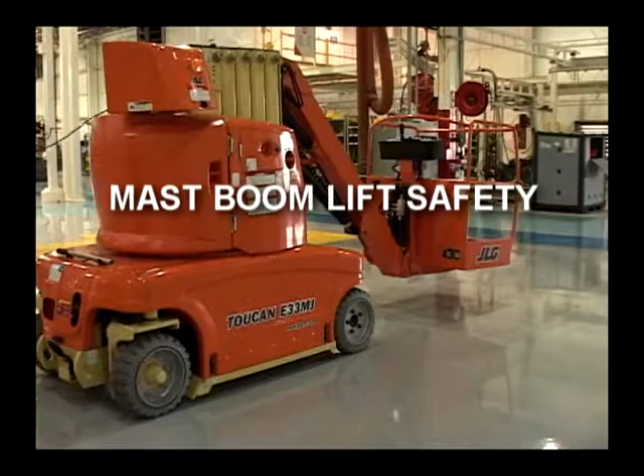JLG Industries Incorporated presents JLG Mast Boom Lift Safety, featuring the following models: E18MJ, E26MJ, and the E33MJ. By following the recommendations for safe and proper operation of this machine, by viewing this video and reading and understanding the operation and safety manuals, you accept responsibility for the safe and proper operation of your JLG lift.

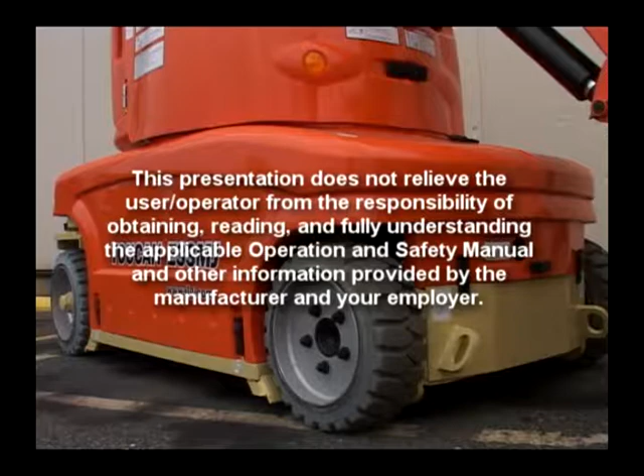This presentation does not relieve the user or operator from the responsibility of obtaining, reading, and fully understanding the applicable operation and safety manual and other information provided by the manufacturer and your employer. In addition, the operator and employer are responsible for complying with the federal, state, local, and provincial rules and regulations covering the proper use and operation of this product.

The Operation and Safety Manual, a safety handbook, and a copy of the ANSI Manual of Responsibilities A92.5 can be found in a plastic compartment located on the platform. These documents must be kept with the machine, and if not available, may be obtained by calling 877-JLG-SAFE, 877-554-7233.

Pre-start inspection. Before each use, a walk-around inspection must be conducted to make sure that there is no visible damage, loose or missing parts, excessive wear, or fluid leakage. The Operation and Safety Manual contains a complete inspection procedure that must be followed. The inspection includes the following: the tire and wheel assemblies, properly secured, no loose or missing lug nuts. The drive motors and brakes, no evidence of leakage. Check under the machine for loose or missing parts as well as any fluid leaks indicating possible damage to the machine.

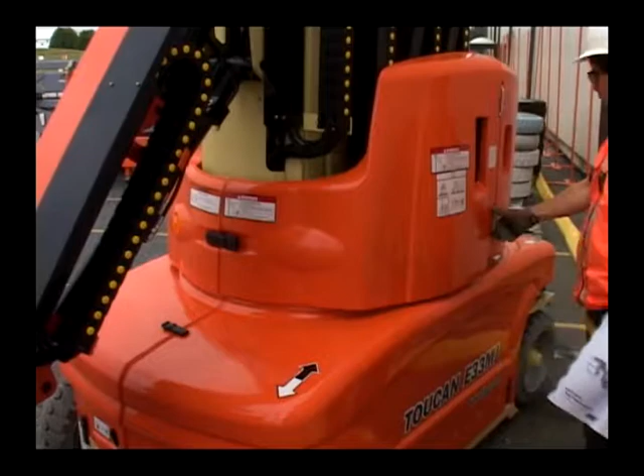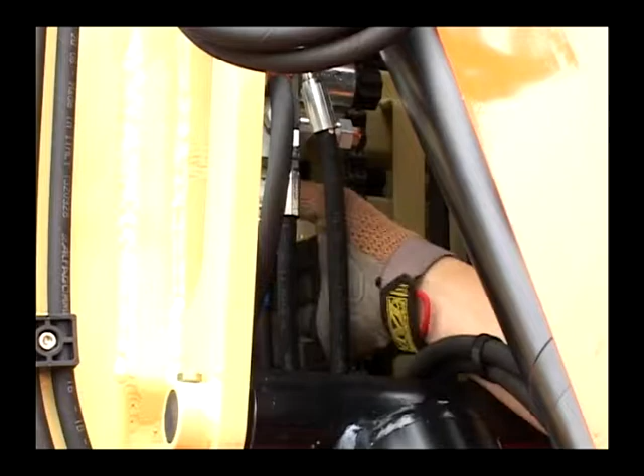The JLG Mast Booms are equipped with a pothole protection system integrated into the frame, providing additional support for the lift should the wheel be driven into or positioned over an unprotected floor opening. The hood assemblies. Make sure there are no loose or missing parts, securely fastened and no visible damage. The mast installation, including the mast chains, electrical cables, hydraulic hoses, and all pins, must be installed and in good condition. Chains must be correctly tensioned and lubricated.

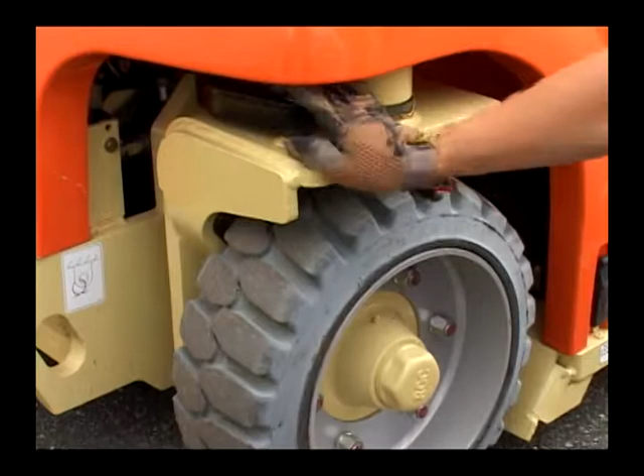The steering assembly, including the spindles. Check for excessive wear or loose or missing parts. The hydraulic control valve. No visible damage, hydraulic hoses undamaged, and no leaks. The hand pump and manual descent operation. Make sure that the decals are legible. The battery charger, properly secured. Consult the service manual for battery charger operation. Different battery chargers are used on different models, so the charger LEDs may not be the same.

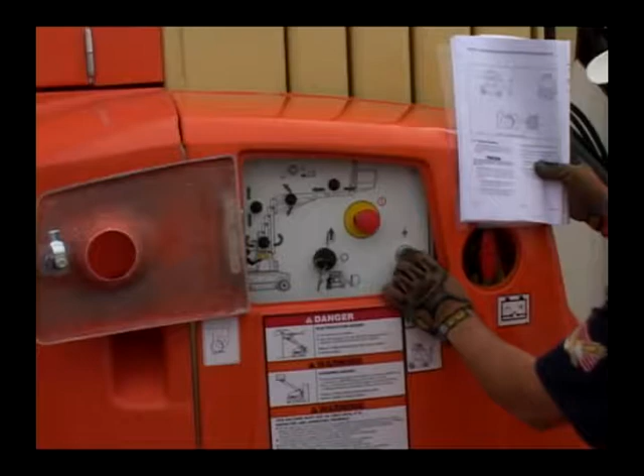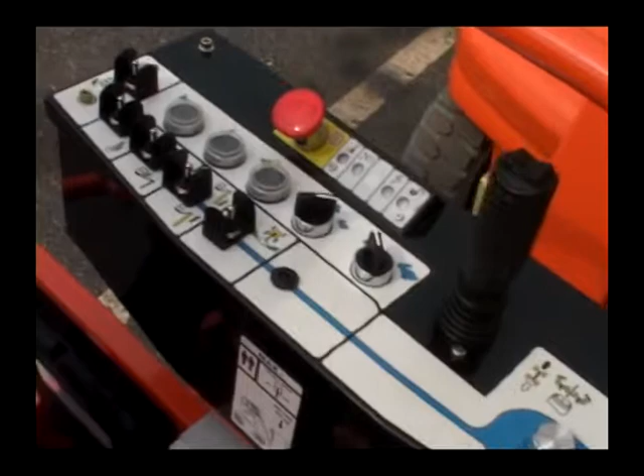The ground control console. Make sure the switches and buttons return to neutral and the decals and placards are secure and legible. The platform assembly, including the platform controls, guardrails, and entrance gates. Make sure the switches and levers are returned to neutral, the decals and placards are secure and legible, the control markings are legible, and the foot switch works properly, not modified, disabled, or blocked.

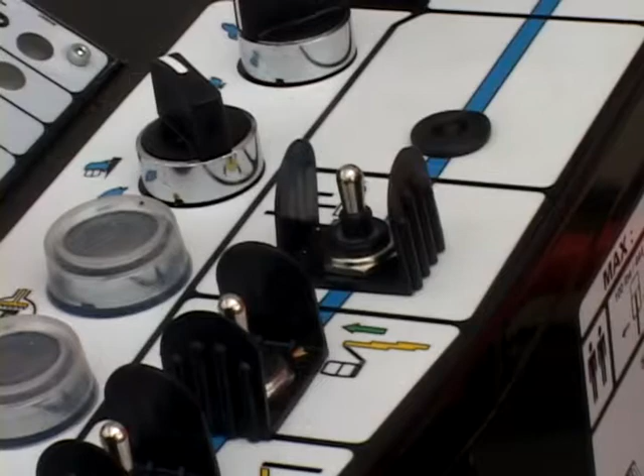Also include the following as part of the walk-around inspection. Placards. Keep all information and operating placards legible, clean, and unobstructed. Make sure none of the decals or placards are missing and that all illegible decals and placards are cleaned or replaced. Protect when spray painting or shot blasting to maintain legibility. Ensure that all copies of the applicable manuals, the Operation and Safety Manual, AEM Manual, and the ANSI A92.5 Manual are in the manual storage holder.

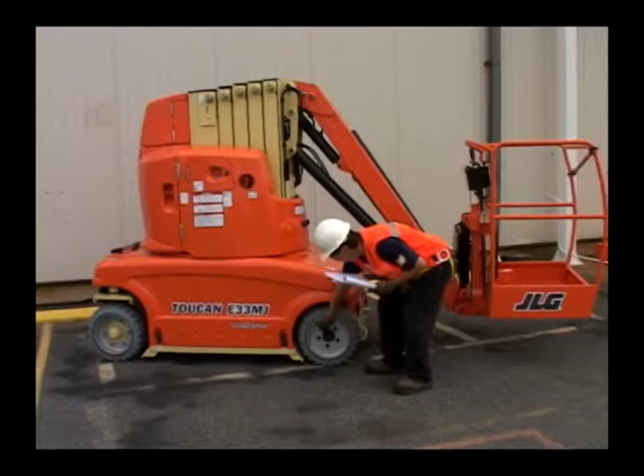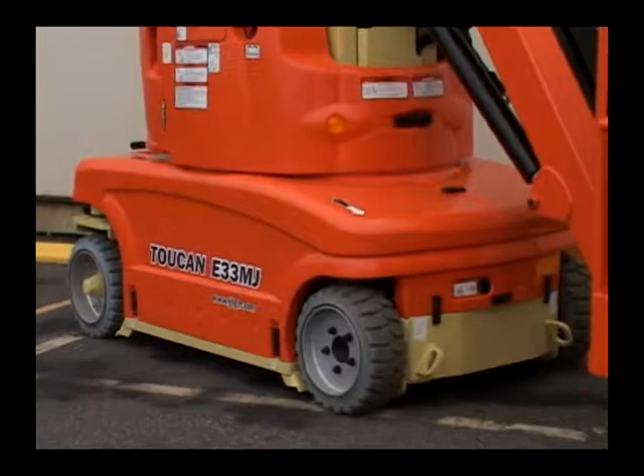Ensure that all periodic inspections and maintenance has been completed as outlined in the Operation and Safety Manual for your specific mast boom lift. Check the machine for modifications to original components. Ensure that any modifications have been approved by JLG. Ensure overall cleanliness. Check all surfaces for leakage, oil or battery fluid, and foreign objects. Inspect the machine structure for dents, damage, weld, or apparent metal cracks or other discrepancies.

You should start each day with fully charged batteries. Don't smoke or have any open flames when recharging. If there is any evidence of a problem, shut down the lift, remove it from service, and notify the proper authorities.

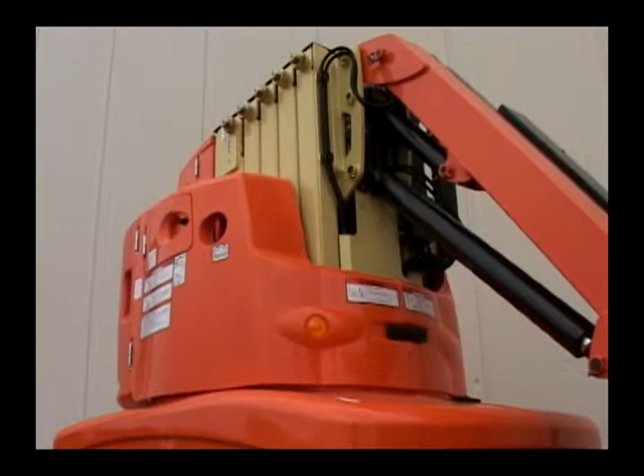Controls and daily function check. A function check of all systems must be performed after the walk-around inspection is complete. The machine must be positioned on a smooth, firm, level surface in an area free of overhead and ground level obstructions. Read, understand, and obey all danger, warning, and caution placards and operating instructions on the machine and in the applicable manuals prior to operation. Do not operate the machine until you've done so. Before operating the lift, verify that you're using the proper personal protective equipment.

JLG E18MJ, E26MJ, and E33MJ lifts are equipped with control panels that use symbols to indicate control functions. Refer to your Operation and Safety Manual or the legend located near the platform and ground controls for a listing of these symbols and their corresponding functions.

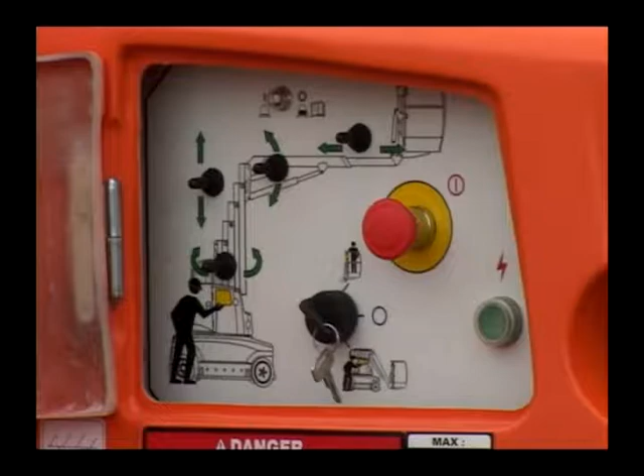Now complete a function check of the machine from the ground controls. The battery disconnect switch is located beside the ground control station. The switch needs to be rotated clockwise to connect and counterclockwise to disconnect the batteries. The Power Select key switch is a 3-position key operated switch that provides power to either ground or platform controls.

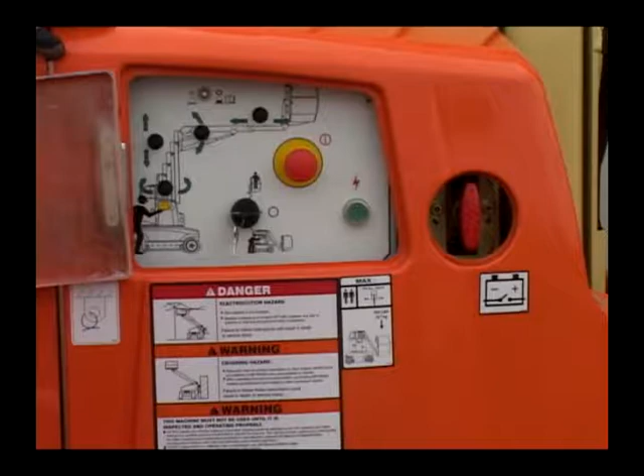The red emergency stop switch button shuts off power to all functions when depressed. Turn the button clockwise to reset the emergency stop switch. The green Function Enable button must be pushed and held to operate any function.

The turntable swing switch. Move the switch to the right to swing the turntable to the right, or move the switch to the left to swing the turntable to the left. The machine has a non-continuous 360-degree swing function.

Mast up and mast down functions are activated by pressing either the mast up or mast down switch. Platform movement stops when a selected switch is released. Raise and lower the platform through several cycles. Check for smooth operation.

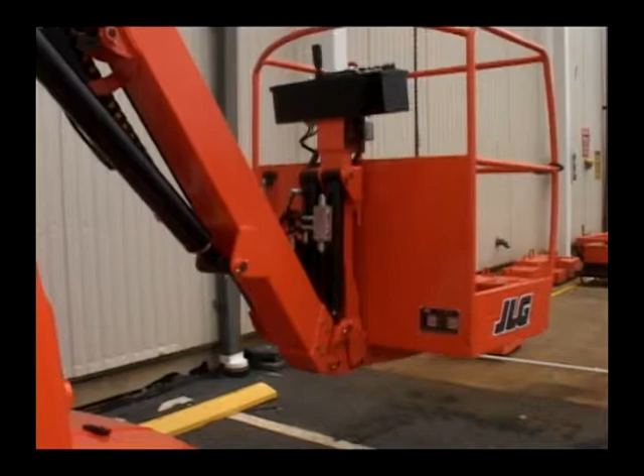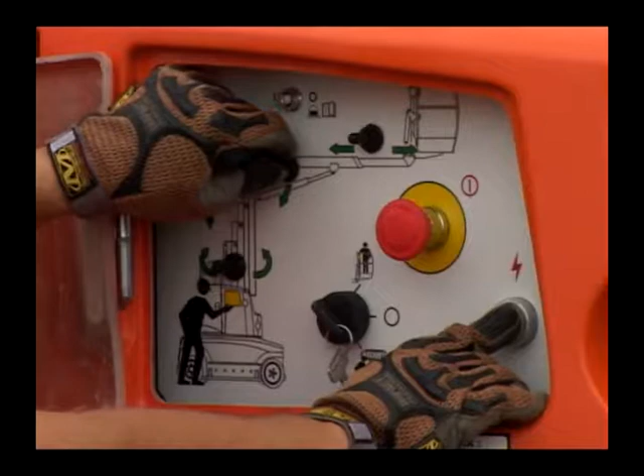The jib boom switch moves the jib up or down. The jib boom will reach above the mast to gain higher heights or fold up below the mast to fit through doorways. Moving the jib up or down will automatically keep the platform level. Please note, the platform level does not have a manual override switch in the ground control of the E33MJ.

On the E33MJ, the jib boom telescope in and jib boom telescope out functions are activated by pressing the jib boom telescope in or out switch. The jib boom telescope allows extra reach anywhere in the working envelope.

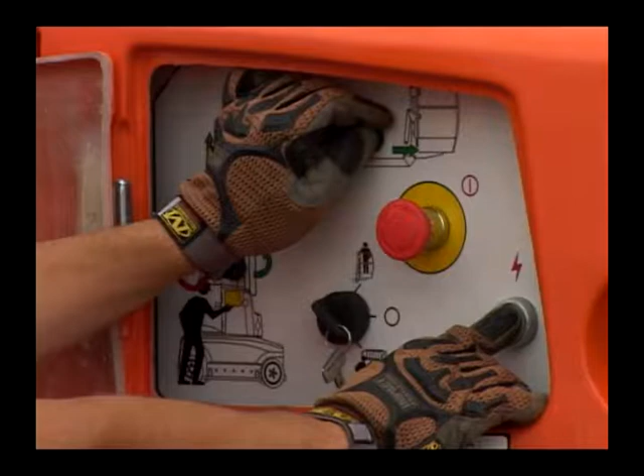Check the emergency stop switch button function by depressing it while raising the jib. All machine functions will be disabled if it's functioning properly. If it functions properly, reset the emergency stop switch button for operation.

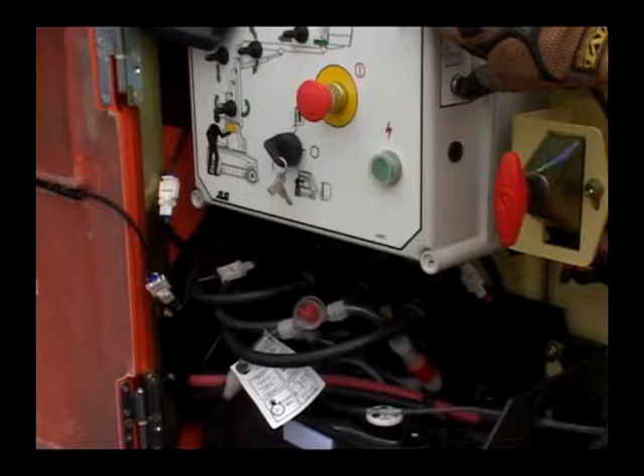The battery filling pump button is located beside the right hood cover. Depressing the push button to activate the battery filling pump will replace evaporated water from the batteries. An indicator will stop turning when the batteries are full.

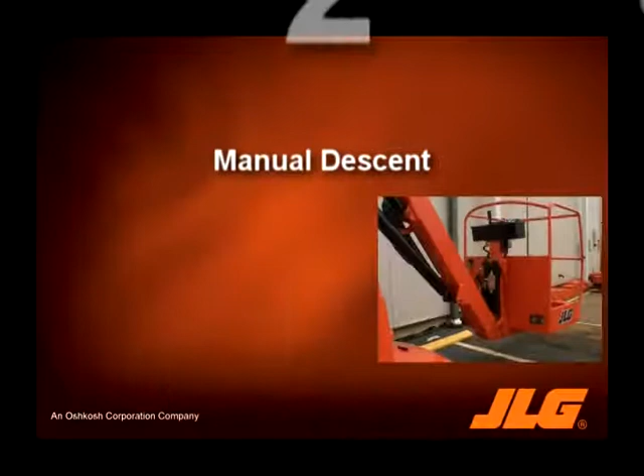The manual descent valves are individual hydraulic valves for each function located at the front base of the machine that can be used to lower the platform in the event that the platform and ground control stations are inoperable. To operate the manual descent valves and lower the jib boom, mast boom, jib boom telescope, or swing, press and hold the override push buttons located at the top and bottom of each valve while activating the hand pump.

Verify the proper operation of the manual descent system. Raise the platform between 2 and 3 feet with the jib boom switch at the ground controls. Locate the manual descent system and follow the operating instructions as specified in the Operation and Safety Manual and on the machine.

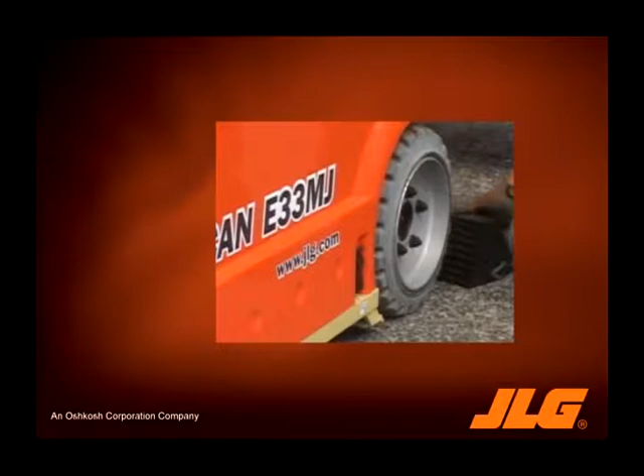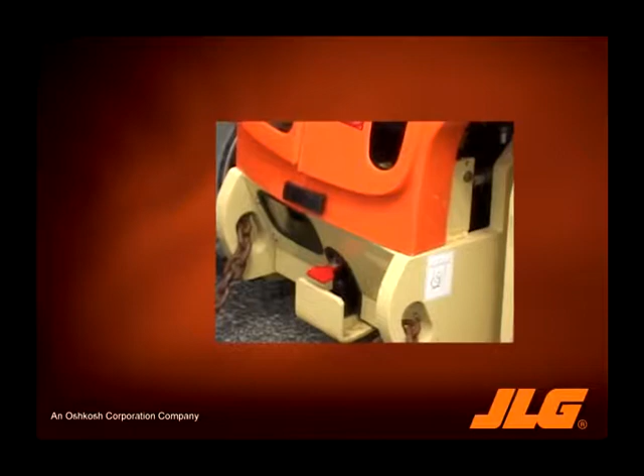The brake release lever disengages the brakes when moved to the unlock position and activating the hand pump. The brakes must be disengaged when moving the machine by any means other than driving, such as pushing or using a forklift when applicable. Only disengage the brakes when the machine is placed on a level surface or when the machine has been fully restrained to prevent unintended movement.

The brakes must be re-engaged by moving the brake release lever to the lock position. The brakes must be engaged before any function will operate from the ground or platform control station. This concludes the functional check of the ground controls. Now perform a functional check of the platform controls.

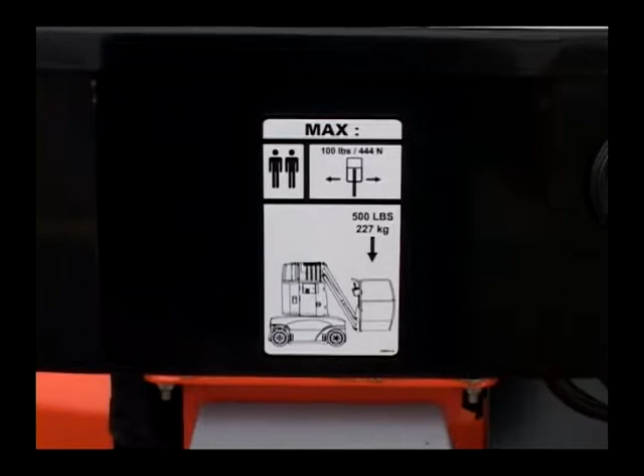Platform operations. The maximum rated capacity of the mast boom lifts are displayed at the platform and in the Operation and Safety Manual. The 500-pound rated platform capacity includes the weight of the operator and tools. Care should be taken to never exceed the rated capacity.

Use extreme caution when entering or leaving the platform. Ensure that the platform is fully lowered. Always face the machine and use the 3-point contact method when entering or leaving the platform. The 3-point contact method means that 2 hands and 1 foot, or 1 hand and 2 feet, are in contact with the machine at all times while entering or leaving the platform.

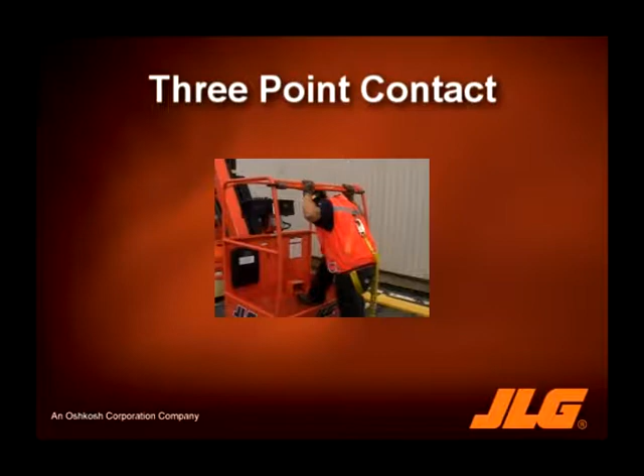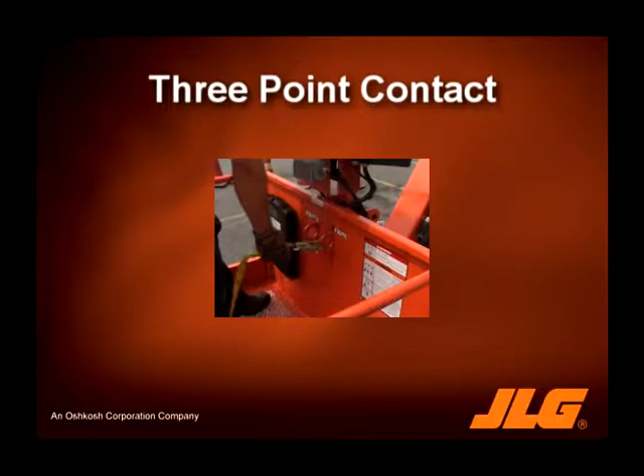Enter the platform. Ensure that the drop bar is closed and properly secure the lanyard for your fall protection device to the designated anchorage point. The red emergency stop switch button shuts off power to all functions when depressed. Turn the button clockwise to reset the emergency stop switch button.

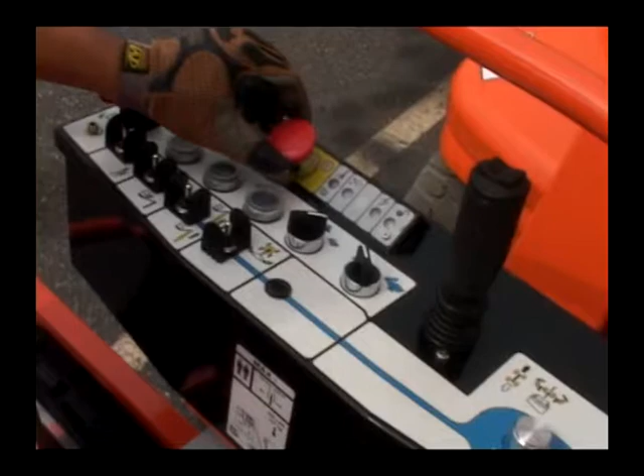First, check the battery discharge indicator. As the battery discharges, the bar light moves from the right to the left; 10 bars showing 0% discharge. As the machine is worked, the light bar will slowly move to the last 2 light bars on the left side. At 80% discharge, the power will be cut off and the batteries will need to be charged. The hour meter is also located in the same gauge.

The tilt indicator light and alarm. Excessive tilting of the machine will turn on the red light and an audible alarm if the mast boom is raised above the elevation switch setting. Below elevation or in the transport mode, no lights or alarm will sound. Slack chain indicator light and alarm. If the mast boom chains detect a slack in any of the chains, the red light and alarm will sound.

The slack chain indicator light is primarily used when the chains become stretched, damaged, or not adjusted properly. The light will illuminate if the platform is set on an obstruction and the mast boom cannot detect any load. We will cover this more in detail later in this video.

Unauthorized movement indicator is an orange light which indicates the machine is in a configuration where the activation of movement is not permitted. Many conditions will illuminate this light: trying to drive while tilted, trying to jib boom down while in a slack chain condition, trying to use a mast or jib function while driving, and trying to drive while using a mast or boom function are some of the conditions that will cause the orange light to glow.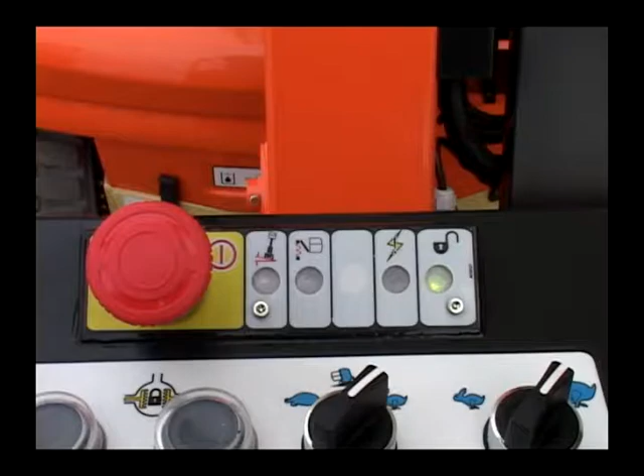Power enable indicator. A green light indicates that the controls are ready. To enable any function, press and hold the foot switch, then press and hold the desired switch to control the functions. The foot switch and function switches must be continuously activated to control the movement of the platform.

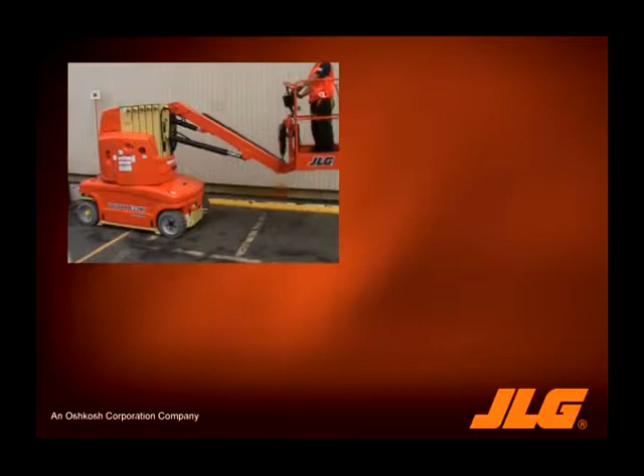Verify the proper operation of the machine functions by raising, lowering, swinging, telescoping, and leveling the platform through several cycles. Also check for smooth operation by using the turntable swing control switch, mast boom control switch, and jib boom control switch. Use the jib telescope control switch and platform leveling control switch for the E33MJ only.

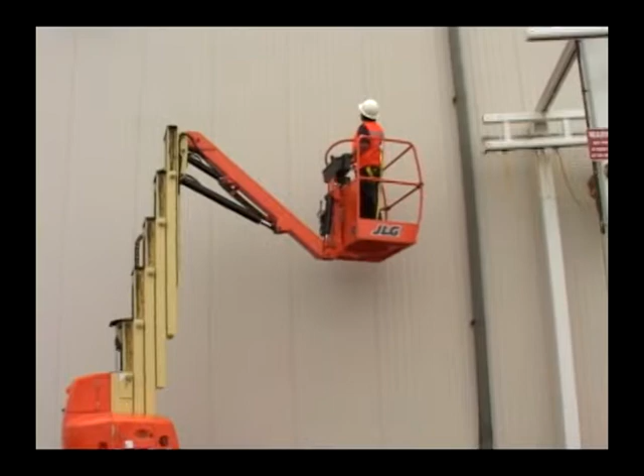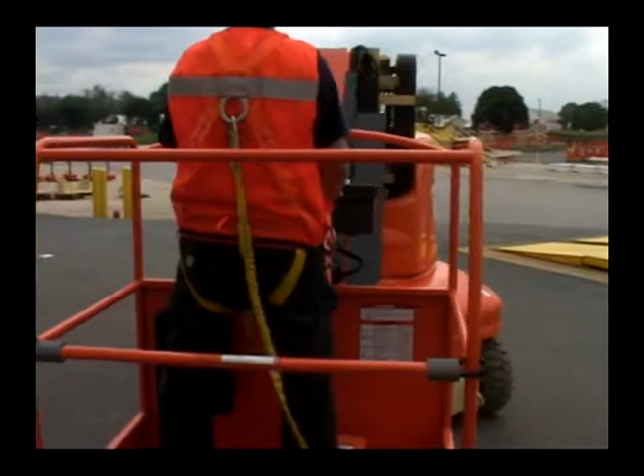When elevating, the platform will automatically stop moving when the maximum height is reached or the mast, jib, or telescope switch is released. When swinging, the platform moves in the direction of the arrow on the platform decal. The swing function is a non-continuous 360-degree rotation. Mechanical stops will keep the turntable from turning more than 360 degrees.

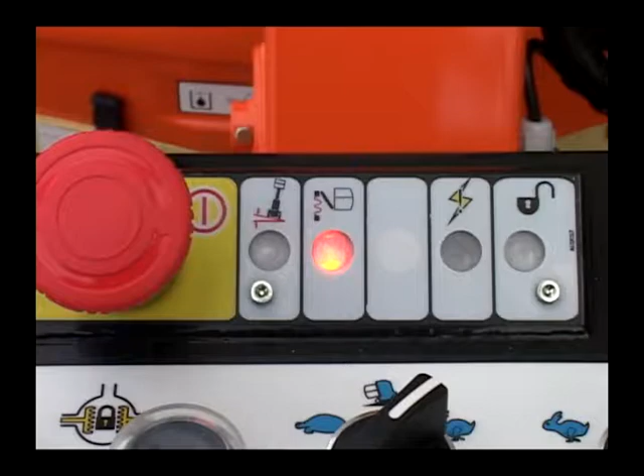If the platform is lowered onto an obstruction and the mast boom continues to lower, one or more of the slack chain sensors will send a signal to the slack chain indicator light and will cut out all functions except the mast boom lift up and the jib boom lift up. To reset this indicator light, use the mast boom lift up or the jib boom lift up switch.

The jib boom switch. When elevating the jib boom, be aware that the jib boom travels in an arc to the maximum position. The platform may contact an object. When lowering the jib boom, check the area under the platform to make sure it is clear. Always lower the platform to the fully lowered position before exiting the platform.

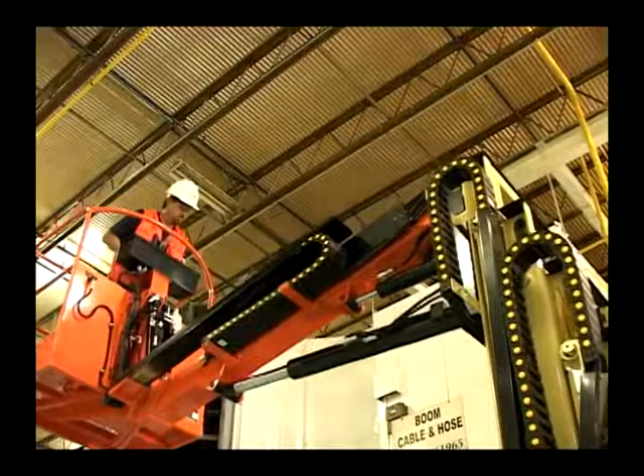When extending the jib boom telescope, the platform, depending on the position of the jib boom, can either raise or lower. Caution should be used not to extend the platform to make contact with the ground. Also be aware the lifting arc of the platform is increased traveling to the maximum position. The platform may contact an object. When retracting the jib boom telescope, the platform, depending on the position of the jib boom, will lower or raise as well. Check under and around the platform to make sure it is clear.

When using the platform leveling control switch, only on the E33MJ, pull the switch to tilt the platform backwards. Push the switch to tilt the platform forwards. This function only works in the transport position, consisting of mast fully lowered, jib boom fully lowered, and jib telescope fully retracted. The platform will automatically level when the jib boom is moved up or down in any position.

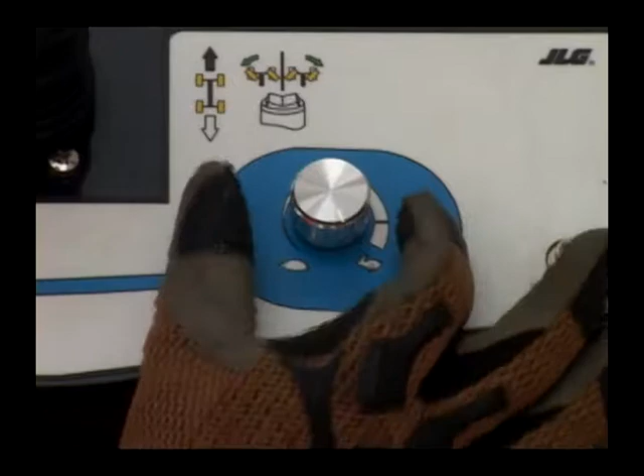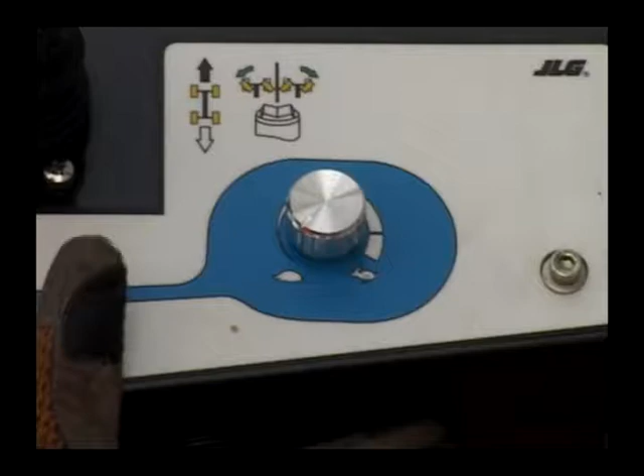The function speed control is used to increase or decrease the speed of movements. When the knob is turned counterclockwise to the left turtle position, the mast boom, swing, and jib boom movements, except for the drive, are performed at low speed. Turn the knob clockwise to the right rabbit position to increase the speed of the mast boom, swing, or jib boom movements. The horn button will sound the horn.

The auxiliary power button. Once the electrical power is cut due to excessive battery discharge, 80%, the auxiliary power button can be pressed to use the remaining battery charge to travel to the charging station. The button must be pushed and held before the controls are enabled and the desired movement is controlled. An audio beep is actuated when the button is depressed.

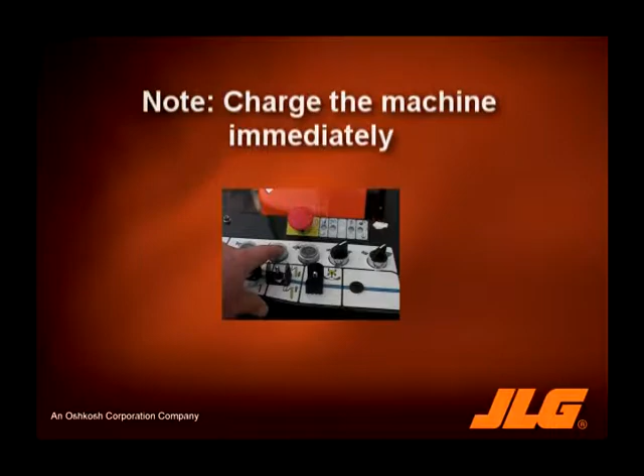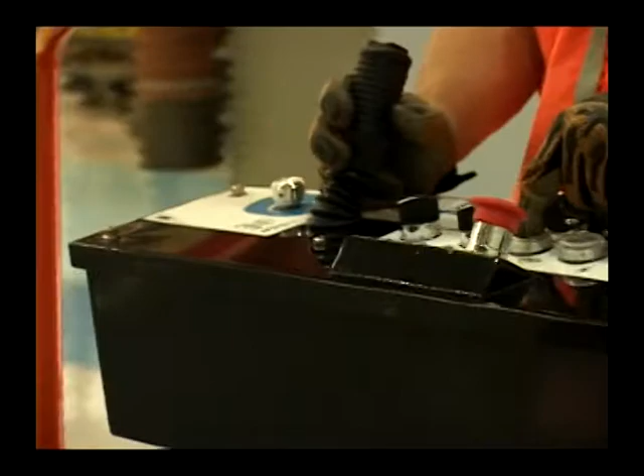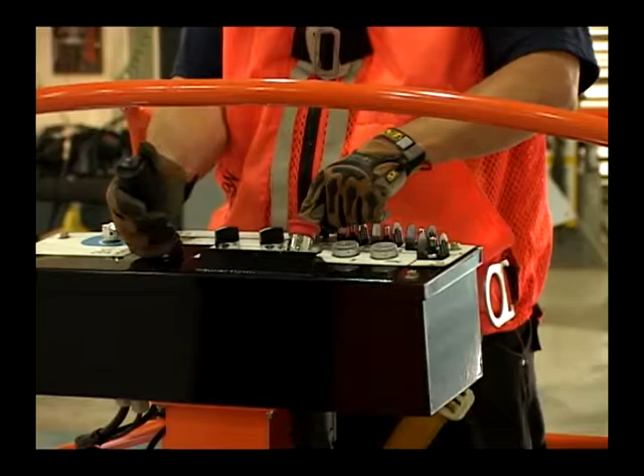The positive traction button must be pushed and held to engage the positive traction function. When a wheel does not have full traction, this control enables transfer of the hydraulic power to the opposite driving wheel. Maximum efficiency is achieved when the wheels are straight. Use of this control should only be temporary. The function is only available when the machine is stowed. This function is not available if the drive speed selector switch is on low speed or turtle.

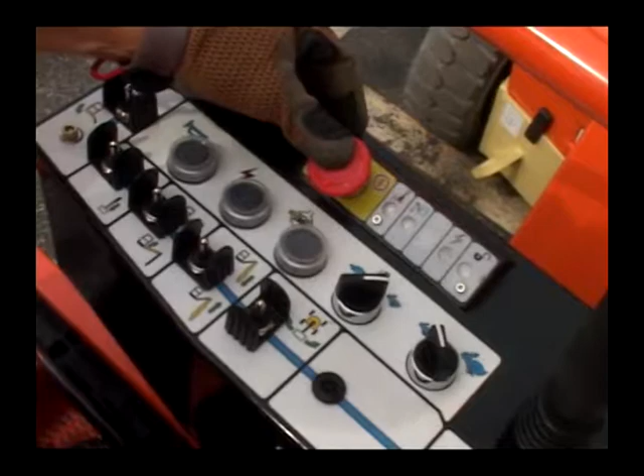If any function selected does not stop when intended, push the emergency stop switch button. Then, if the platform is elevated, seek the assistance of someone to lower the platform using the manual descent valves located at the base of the machine. Immediately notify the proper personnel and remove the lift from service until the problem has been corrected.

Moving the rocker switch on the end of the drive controller will steer the machine in the direction selected. Evaluate the steer function operation, comparing the decal on the platform control to the position of the turntable, so the wheels turn in the desired direction. Steer left and right and check for proper operation.

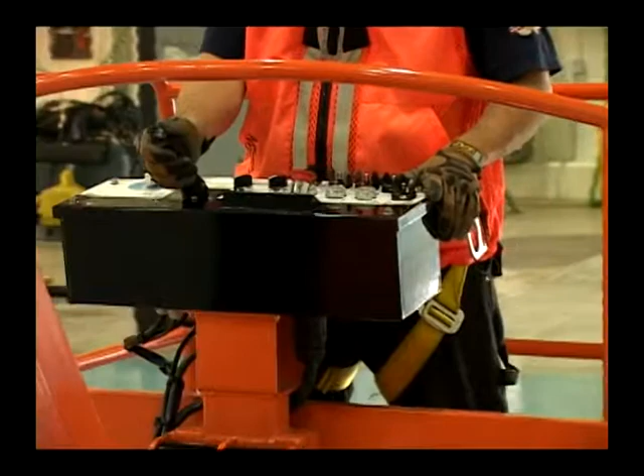To enable the drive function, depress the foot switch, lift up on the ring to unlock the controller, then move the drive control handle to drive forward or reverse. Push forward to drive forward and pull back to drive in reverse. Check the drive function for proper operation by driving forward and reverse.

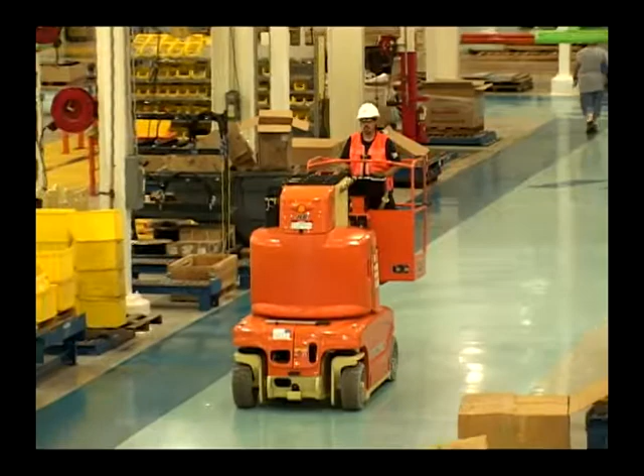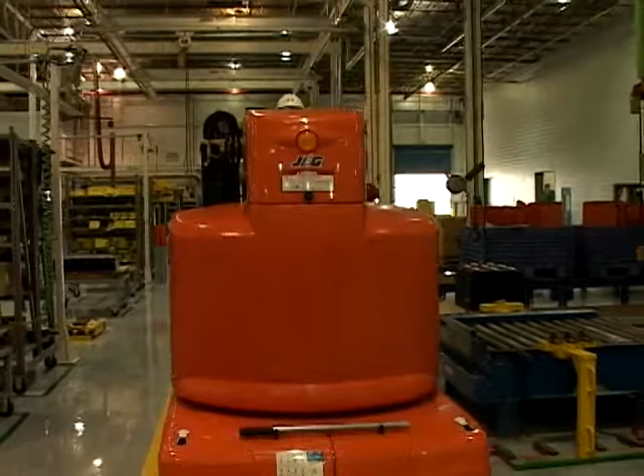The drive control handle is proportional, allowing the drive speed to be decreased or increased by the movement of the handle. Never slam the control handle through neutral to the opposite direction. Always return to neutral and stop before moving to the next function. Operate controls with slow and even pressure.

The black and white direction arrows on both the chassis hood and the platform control box will help the operator orientate the direction of travel if the boom is swung 90 degrees. Match the black and white arrows on the decal by the drive controller to the arrows on the chassis hoods so the machine will move in the intended direction.

A drive speed selector switch allows the machine to have 3 speeds. Turtle, or first speed, is a slow speed for positioning the machine in tight areas. Ramp, or second speed, is for climbing speed and allows the machine to climb maximum grades. The grade must not exceed the rated gradability as stated in the Operation and Safety Manual for the applicable JLG lift model. Rabbit, or third gear, allows the machine to travel at maximum speed.

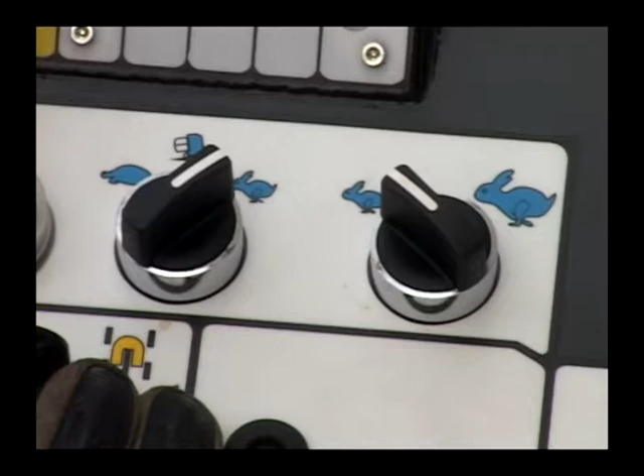A second drive speed selector switch is only used on the E33MJ. This switch is called the Drive Extra Speed Selector Switch and has a small rabbit and large rabbit. This control is operational only when the drive speed selector is in third speed. To enable fourth speed, the Drive Extra Speed Selector switch is positioned on the large rabbit. Once in fourth speed, a secondary hydraulic power unit will start at the end of the drive control joystick travel, thus increasing the drive speed.

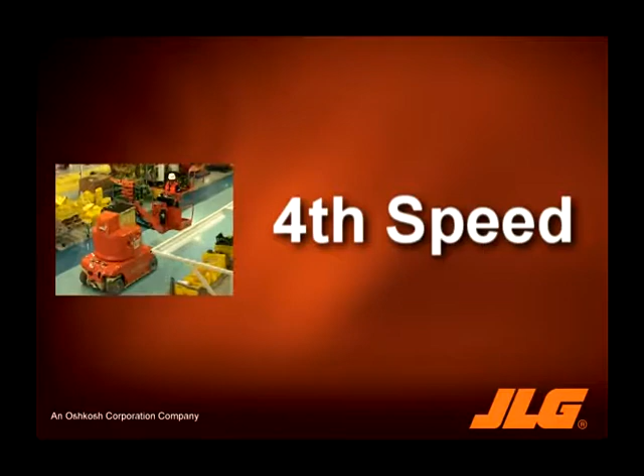Use of this control is reserved to travel over long distances and on horizontal grounds. If the machine arrives on a sloped surface, the secondary power unit will stop and start again only when the machine returns to a level surface.

The maximum drive speed is automatically reduced when the mast boom is elevated above transport position approximately 6 inches. On the E33MJ, there are 2 additional cutouts, 2 inches extended on the jib telescope and 20 inches on the jib boom. If the maximum drive speed does not reduce when the platform is elevated above 20 inches, shut down the machine, remove it from service, and notify the proper personnel.

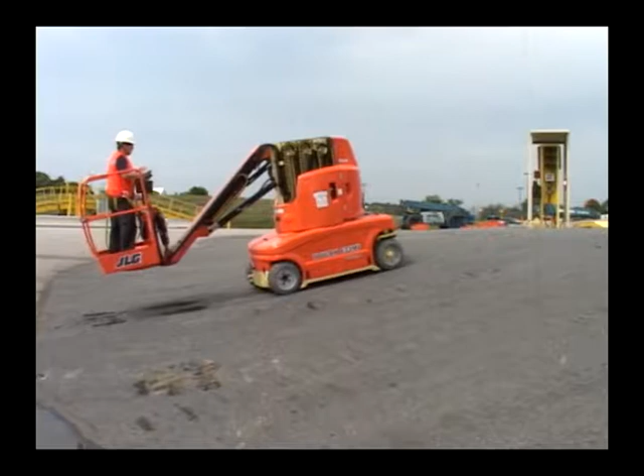With the platform in a stowed position, check that the drive brakes hold when the machine is driven up and stopped on a grade. The grade must not exceed the rated gradability as stated in the Operation and Safety Manual for the applicable JLG lift model. Ensure that all drive and/or lift cutouts operate properly.

The lift is equipped with a tilt sensor and a drive lockout function that disables the elevation control when the lift is positioned on a slope greater than 5 degrees. With the platform elevated, the drive control is disabled when the lift is driven on a slope greater than 5 degrees. Consult the specific model and country specifications in the Operation and Safety Manual to determine the cutout settings on your specific unit. This concludes the functional check of the JLG mast booms.

If any of the functions or cutouts outlined in this video or in the Operation and Safety Manual for the applicable JLG lift model do not function properly, shut down the machine, remove the unit from service, and notify the proper authorities.

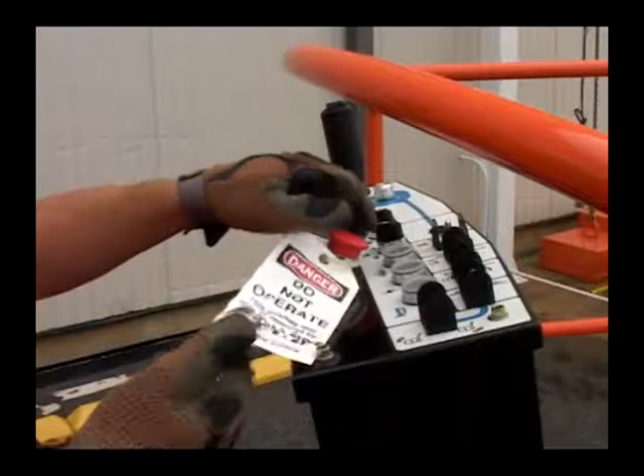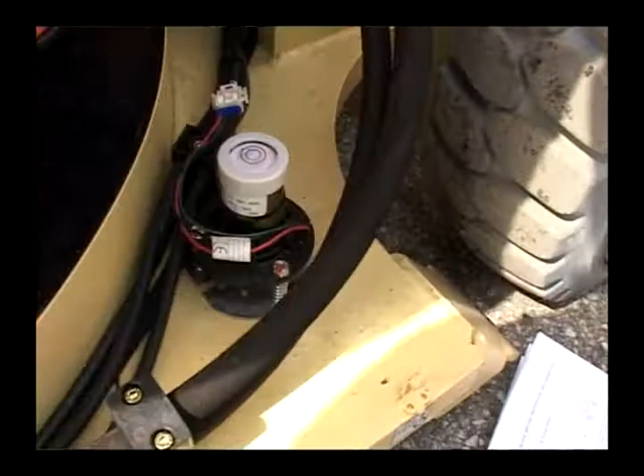Safety precautions. Some general safety precautions must be followed during operation of a JLG mast boom lift. Do not operate any machine on which the safety or instruction placards or decals are missing or illegible. Ensure all safety devices are operating properly. Modification of these devices is a safety violation. Never operate a machine that is not working properly. If a malfunction occurs, shut down the machine.

The machine is not insulated and does not provide protection from contact or proximity to electrical current. Maintain a safe distance from electrical lines, apparatus, or any energized, exposed, or insulated parts according to the minimum approach distance as outlined in the Operation and Safety Manual. Allow for machine movement and electrical line swaying.

Maintain a clearance of at least 10 feet or 3 meters between any part of the machine and its occupants, their tools, and their equipment from any electrical line or apparatus carrying up to 50,000 volts. Refer to the minimum approach distance chart located in the Operation and Safety Manual for additional clearance.

The minimum approach distance may be reduced if insulating barriers are installed to prevent contact, and if the barriers are rated for the voltage of the line being guarded. These barriers shall not be part of or attached to the machine. The minimum approach distance shall be reduced to a distance within the design working dimensions of the insulating barrier. This determination shall be made by a qualified person in accordance with the employer, local, or governmental requirements for work practices near energized equipment. Assume all electrical parts and wiring are energized unless known otherwise.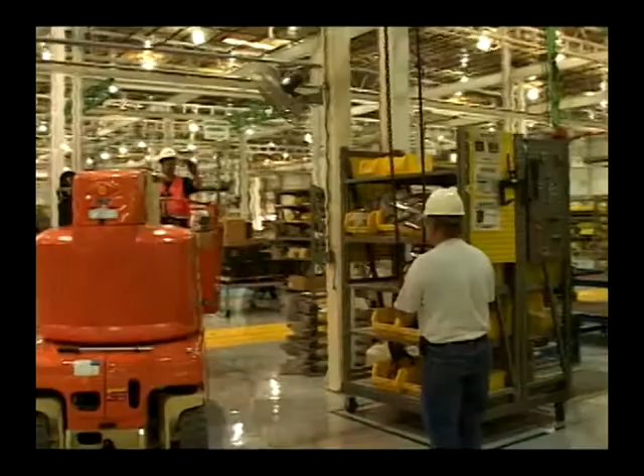Ensure that operators of other overhead and floor-level machines are aware of the lift's presence. Disconnect power to overhead cranes. Warn personnel not to work, stand, or walk under raised platform. Position barricades on the floor as necessary. Do not operate or raise the platform while on trucks, trailers, railway cars, floating vessels, scaffolds, or other equipment unless approved in writing by JLG.

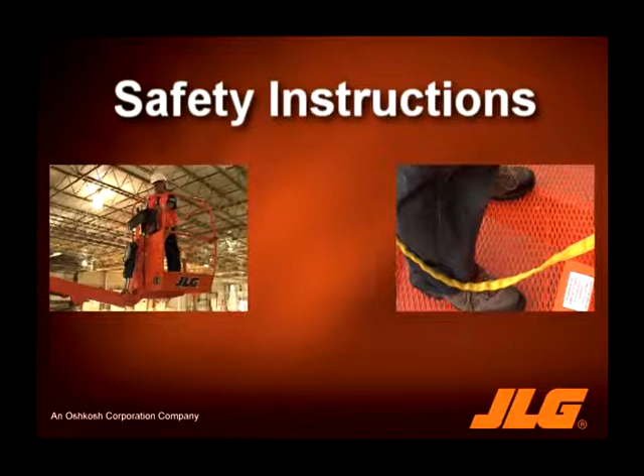During operation, keep all body parts inside the platform railings. Check work area clearances above, on sides, and bottom of the platform when lifting and lowering the platform. Do not carry materials directly on the platform railings. Keep both feet firmly positioned on the platform floor at all times. Never use ladders, boxes, steps, planks, or similar items on the platform to provide additional reach. Always ensure that power tools are properly stowed and never left hanging by their cord from the platform work area.

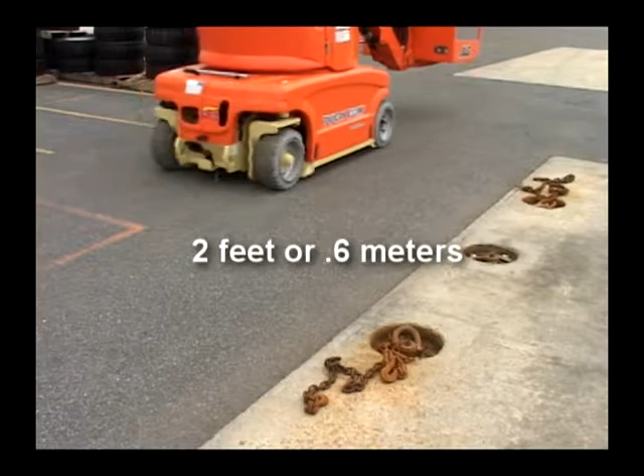Avoid any buildup of debris on the platform floor. Keep mud, oil, grease, and other slippery substances from footwear and the platform floor. Keep the chassis of the machine a minimum of 2 feet, 0.6 meters, from holes, bumps, drop-offs, obstructions, debris, concealed holes, and other potential hazards at the ground level. Be aware of stopping distances and all drive speed. The user should be familiar with the work area surface before driving.

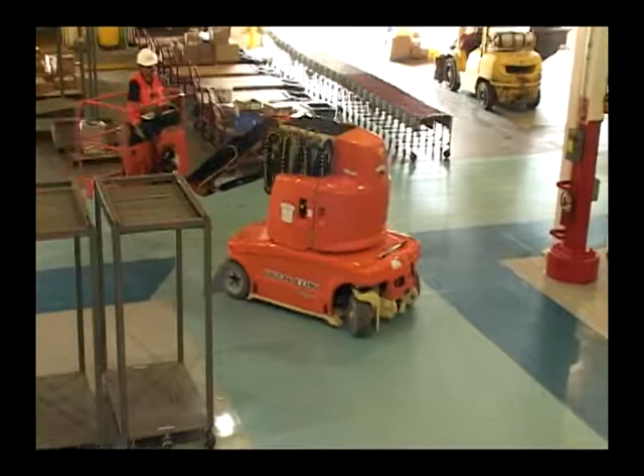Exercise extreme caution at all times to prevent obstacles from striking or interfering with operating controls and persons in the platform. Do not drive at high speeds in restricted or close quarters or when driving in reverse. Always post a lookout when driving in areas where vision is obstructed.

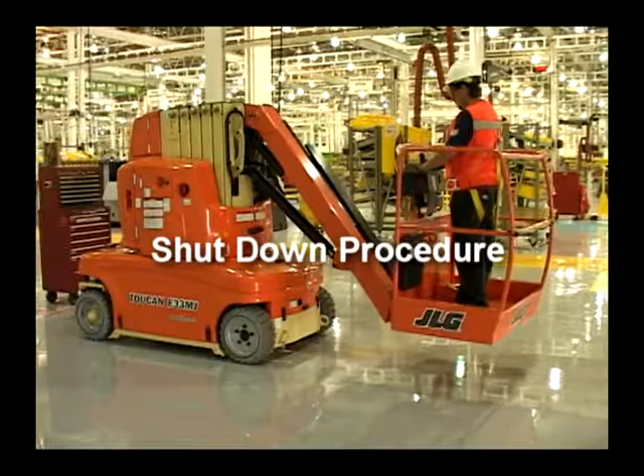Shutdown procedure. To shut down and park the machine, first drive the machine to a well-protected area. Ensure the platform is fully lowered. Push in the emergency stop switch buttons at the platform and ground controls. Position the key switch to off. Rotate the battery disconnect lever to disengage battery power. Chock at least 2 wheels when parking the machine for an extended period of time.

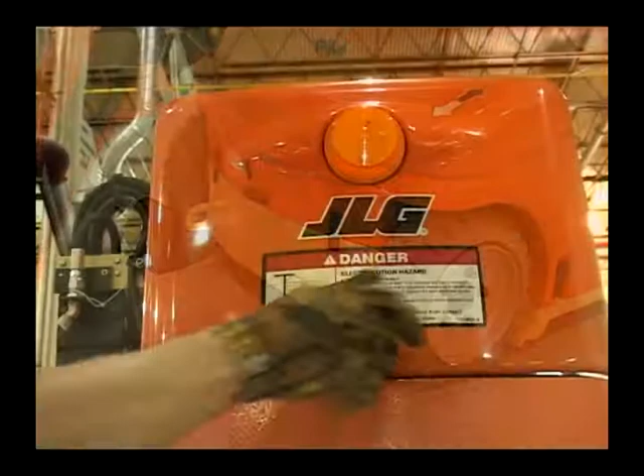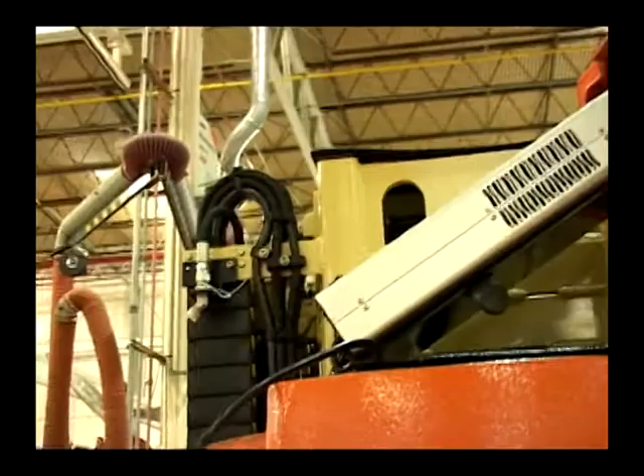Charging the battery. Always charge the battery in a well-ventilated area. The JLG mast boom lifts are equipped with an automatic battery charger that will stop charging when the battery is fully charged. The battery can be charged daily without concern for overcharging or damage to the battery. To charge, place one end of an extension cord rated for 15 amps into the charge plug receptacle at the front of the lift and the other end into a standard 110-volt outlet.

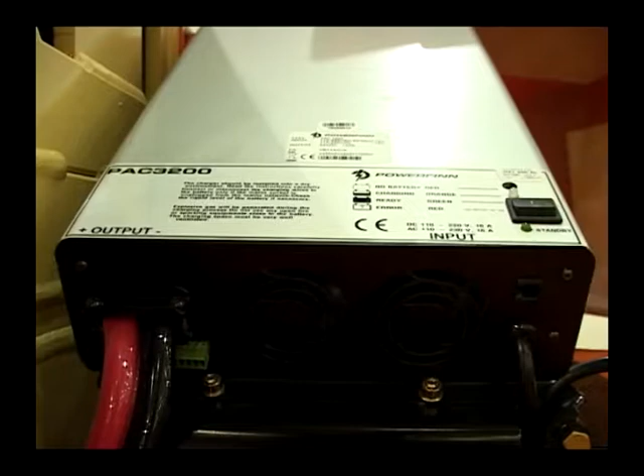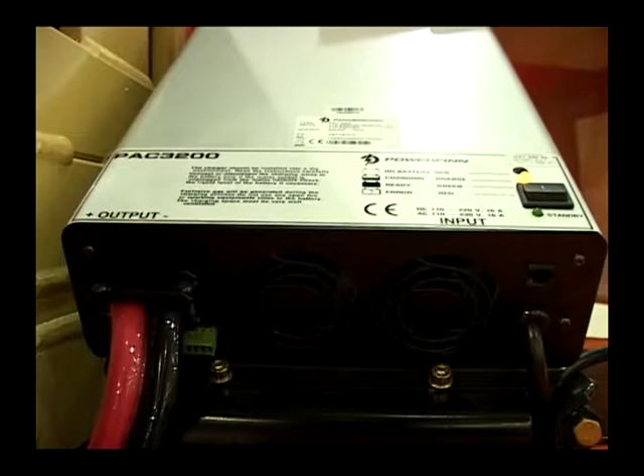When the charger is connected to the power supply, all the functions are cut out. Turn the power switch to the on or I position, which should start the charge automatically. Once the charge cycle is complete, the solid green light will illuminate. Check the service and maintenance manual for further information.

Other than driving the machine, a JLG mast boom lift may be transported from place to place by pushing it on its base wheels, moving it with a forklift truck, or by transporting by truck or trailer. Refer to the operator and safety manual before transporting with a forklift. Prior to moving the machine by pushing or using a forklift, the brakes must be disengaged. The brakes must be re-engaged after moving the machine. The brakes must only be disengaged when the machine is placed on a level surface or when the machine is fully restrained to prevent inadvertent movement.

When using a forklift truck to move an E18MJ or E26MJ, the forklift pockets on the base frame must be utilized. When transporting the machine by truck or trailer, refer to the Operation and Safety Manual for proper loading, unloading, and tie-down procedures. The truck or trailer used for transport must be rated for the weight of your machine and must be on a level surface while loading. Never load or unload while on a slope. If the machine must be lifted to another level by use of a crane or other similar means, the lifting lugs must be utilized.

Once again, it's important to complete your work safely using the JLG mast boom lift. To do so, you must use the information provided in this presentation, the Operation and Safety Manual, the decals on the lift, employer rules, and common sense.

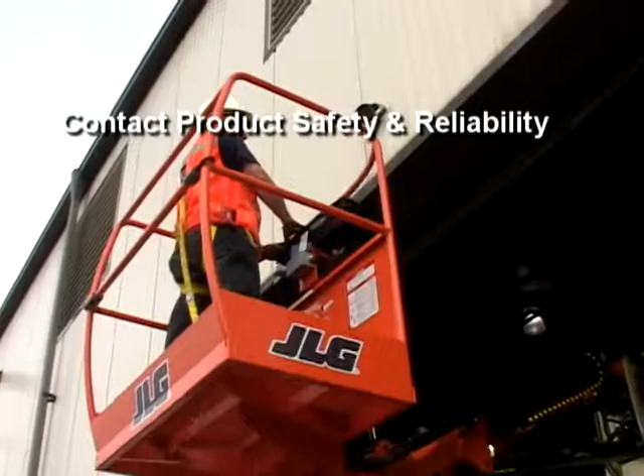If you require further clarification on any portion of this video presentation or the safe operation of your JLG lift, contact the Product Safety and Reliability Department at JLG Industries Incorporated at 877-JLG-SAFE, 554-7233, or via email at productsafety@jlg.com.